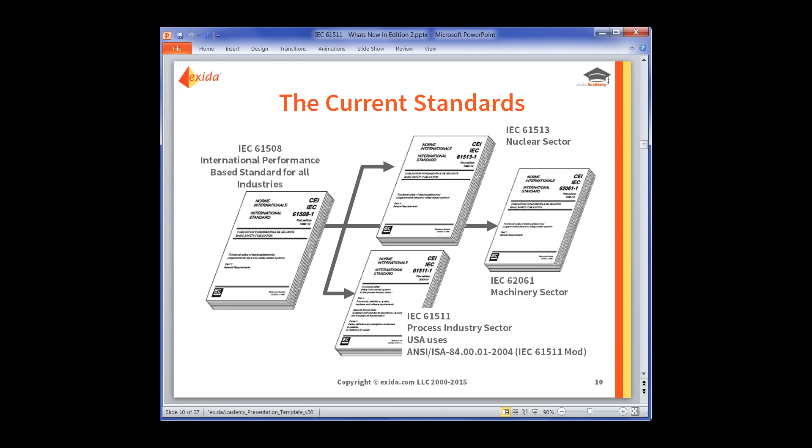So I guess for the new 61511, I'd like to go back to Douglas Adams, the author of Hitchhiker's Guide to the Galaxy, where the guide to everything is written with a cover that has the words "Don't panic" in large friendly letters. And that's probably the first thing I'd like to say about the new 61511, and that is, don't panic. Yes, it is a revision to the existing 61511, but most things remain the same, and the changes that are introduced as part of the second edition are A, generally good, and B, generally small to moderate in nature.

So again, 61511, as it has since its initial release, will still target the end users, engineering contractors, and integrators in the process industries area. It will still cover the entire safety life cycle, from analysis phase through design, construction, installation, commissioning, validation, etc., into operations, maintenance, management of change, and eventually decommissioning.

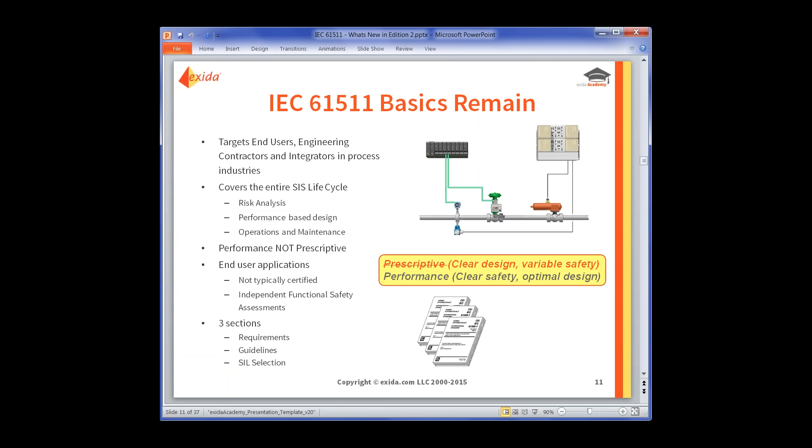Again, still focused on end user applications and still divided into the three main sections of the requirements in part 1, guidelines and advice in part 2, and then still SIL selection and risk analysis in part 3. It has the same relationship with 61508 as it always has had, with one sort of legal technicality. 61511 from 2004, whenever it references 61508, it references the first edition of 61508 because that's the only edition that existed in 2004. The second edition of 61508, which came out in 2010, was not referenced by the original 11.

However, now that 61511 is going into its second edition, all of the references to 61508 will now be from the second edition of 61508 issued in 2010. But everything else remains the same. 61508 is generally focused on the design, construction, and fundamental programming of safety devices. And 61511 is still focused on the use and application of those devices in the process sector. So none of that has changed.

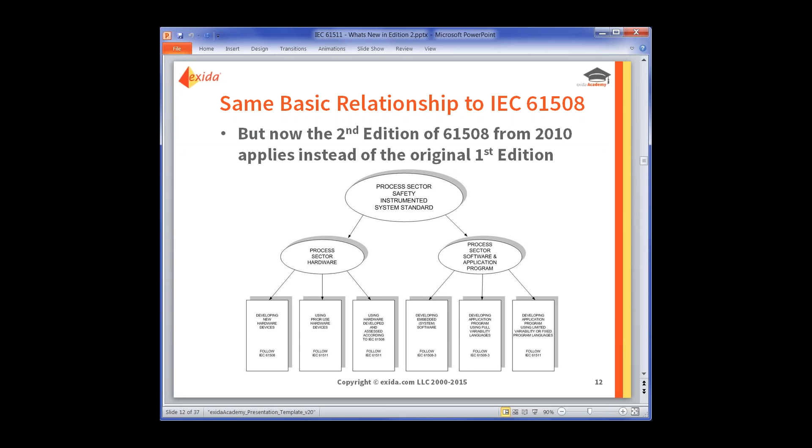The 61511 safety life cycle, it's still the same as before. We still have analysis phase, standard activities, estimating the risk, understanding the protection layers, and developing any requirements into a safety requirements specification. We then work into the same design phase, the same optional factory acceptance testing, installation, commissioning, and validation. And again, the same operation, maintenance, modification, or management of change and decommissioning, all of which remain supported by the verification activities, the safety life cycle structure and planning, and the management of functional safety and functional safety assessment requirements.

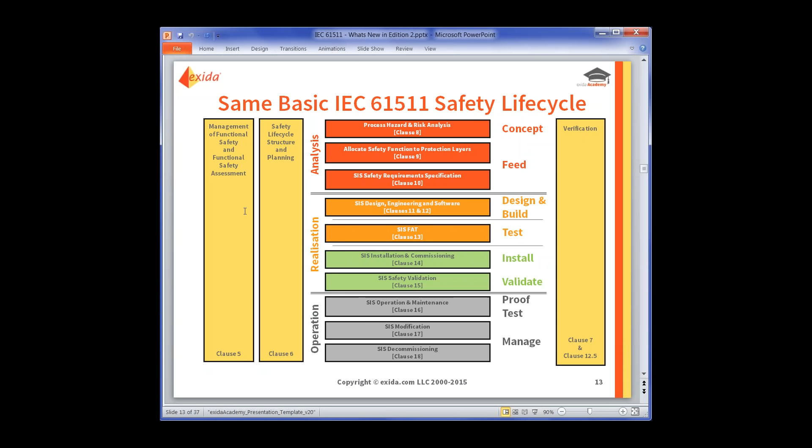It's still the same very powerful idea of setting up a risk control system. The risk controller, if you will, operates off of our tolerable risk set point, compares that to the risk we analyze in the analysis phases, and then generates a response of our safety requirements specification and other means of risk reduction to manage that risk back down to our target set point. We execute, design, build, validate, etc. that set of equipment. And then we feed into the operations phase where we again observe the behavior of that equipment and have now a real measure of actual risk that we compare back to our risk tolerance and again generate any required responses to that. This all remains the same.

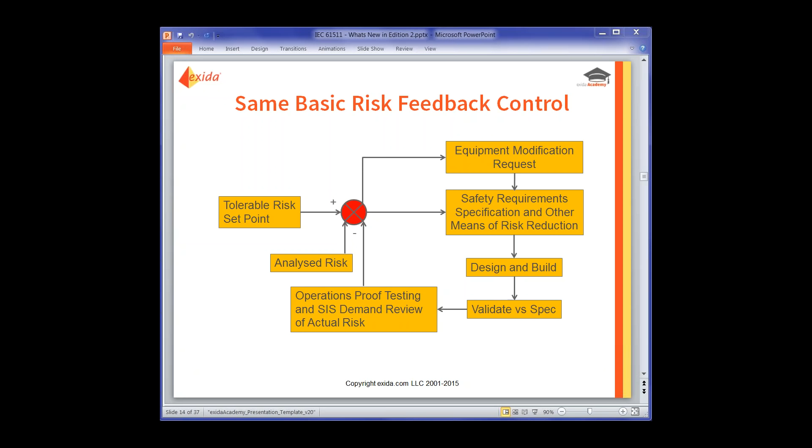So, what is different? Well, as I said, at the finer levels, there are a number of tweaks to various definitions, and by and large, these are at least generally regarded amongst the committee and the community as improvements. And the first of these is providing a bit better clarification on common failures. So we've got both common cause failures, which result from a single event, where these failures are not consequences of each other. So they're not an event that causes another event. Those are not common cause failures.

Then separate from that, we have common mode failures. Now these are failures at the same time of different pieces of equipment that fail in the same way. So if I have a unit that fails at the same time for a different reason, that is still a common mode failure. But the detailed difference between these two definitions, the most important element here is that each of these common failures is directly stated out. Whenever I have quotes in this presentation, they will refer to exact text from the standard. So we will see that from time to time in all of this. So, as I said, each of these common failure types reduces the effectiveness of system redundancy and fault tolerance. And we'll talk a little bit more about that later.

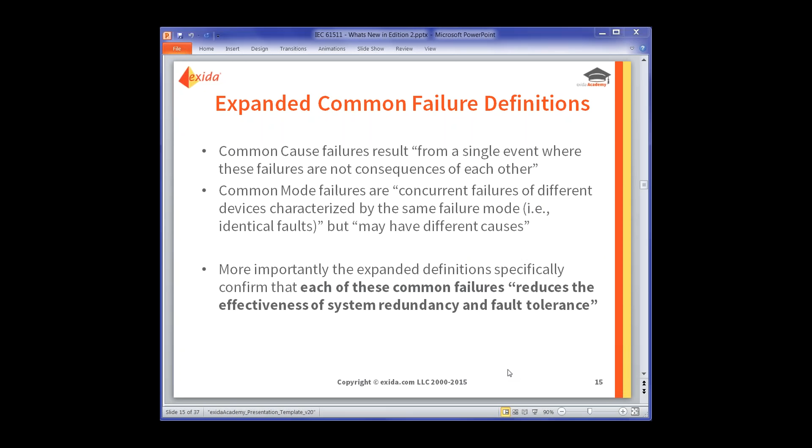Now, we have the completely new term, or at least new to the standard. Many of you have worked with this for quite some time, and that is the concept of a process safety time. The old 61511 really only considered the response time of the safety system. And the statements were very basic that said this response time had to be specified and that specification had to be met.

However, the new 61511 defines the process safety time as the time period between which a failure occurs in the process or the basic process control system and the occurrence of the hazardous event if the safety function is not executed. Now, in Part 2 of the new 61511, the guidance is that the sum of the diagnostic test interval for the programmable or safety logic solver and the time to perform the specified action must be less than the process safety time.

Now, this is actually somewhat different from the generally accepted rule of thumb that says the target response time for the safety system should be less than half the process safety time. So we have a little bit of a gap here between the statement in the standards and the accepted best practice on this. So that is something that we definitely need to pay attention to in our work here. So the difference here is something that we do want to pay attention to.

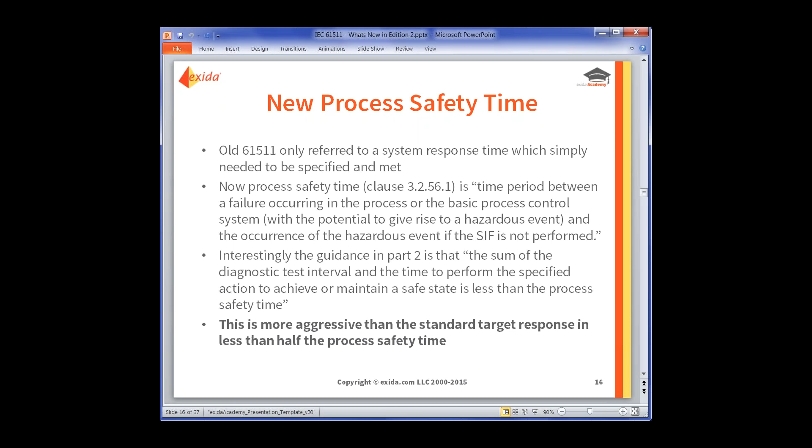All right. Another difference is that safe failures in the new 61511 are somewhat better defined for redundant systems. So whereas the old definition of a safe failure was often something along the lines of any failure which isn't dangerous in certain cases, especially with the old 61508. Now we have a clarification with fault-tolerant systems that say safe failures can either lead to operation where the safety function is available with a higher probability of success on demand.

And the example would be where in a 2 out of 3 configuration, one of the devices fails safe, which then effectively means that we have a 1 out of 2 configuration remaining in that situation. Or again, as we hopefully have always known, a spurious operation where the safety action does trigger remains a safe failure. So we do have a little bit of clarification around the voting structure here.

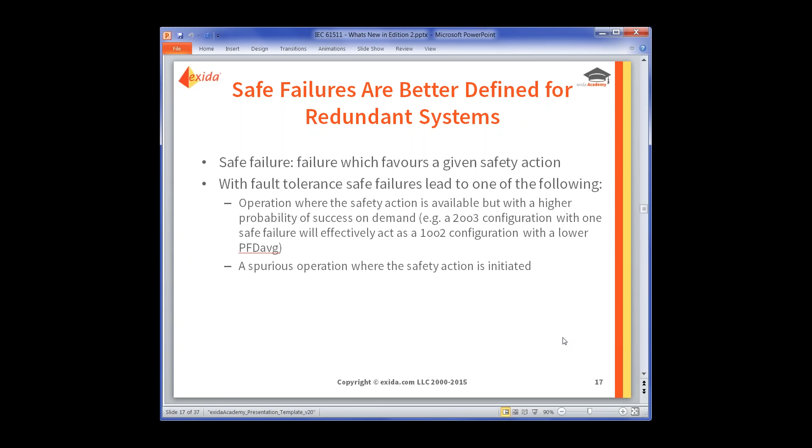This next definition is actually quite an improvement over the old 61511, because the old 61511 actually had a mismatch with both first and second edition of 61508, because the old 61511 did not define a high demand mode of operation. Now, the new 61511 addresses this and clearly defines 3 modes of operation: a low demand, a high demand, and a continuous mode that is now consistent with the definitions of 61508.

The split in all of these is that low demand mode is where the safety function is required to act less often than once a year, and the high demand and continuous mode are where the safety function is required to act more often than once a year. Unfortunately, there's a little bit of a problem in the math here, and the problem is that the proof testing frequency is no longer part of the definition, and this can lead to some difficulties where the calculations might not give you the best answer if you're doing very frequent proof testing on a high demand mode of operation.

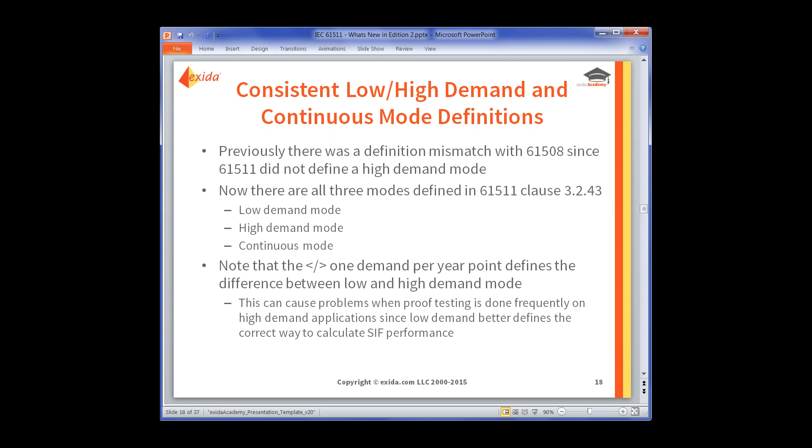We're just going to mention that here. This involves a fair bit of detail in clarifying and specifically explaining, so we're going to need to leave that for another presentation, but at least I want to make sure that we have it noted and mentioned in this current one. So again, we have 3 different modes of operation for our safety function in 61511 that is now in agreement with those same sets of definitions that exist in 61508.

So for low demand, where we have less than once a year requirements for the safety function to act, we use our PFD average calculations. We get credit for proof testing. And we get credit for our diagnostics with lambda D, or dangerous detected failures, lambda DD, as opposed to dangerous undetected failures, lambda DU. In high demand mode, more than once a year demands on the system, no credit for proof testing unless we have a non-zero hardware fault tolerance, and we take credit for automatic diagnostics.

And then finally, the continuous mode, where the requirements for the safety function are so constant that automatic diagnostics no longer have time to act. And as a result, we have both dangerous detected and dangerous undetected failures being equally harmful. And both of those go into the probability of failure per hour calculation for defining SIL in this.

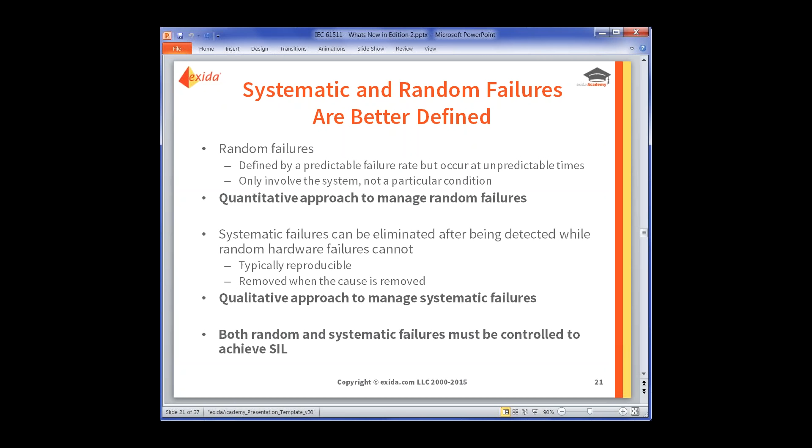And obviously, in order to achieve a given SIL, we need to ensure that both random failures, typically through the numbers in the PFD average calculations, etc., meet the requirements, and also the systematic failures must meet the requirements as well. And this is supported further by the emphasis of this systematic capability concept.

It was present in the previous standard, but in a much more vague way. And now we have a much clearer definition. In fact, it even gets its own acronym. We have an SC level now, a systematic capability level. And this relates to the level of rigor used in the design of our equipment in accordance with 61508, or the level of rigor applied in our proven in use justification, that the devices we're using have appropriately low systematic failures or an appropriately high systematic capability.

Now, again, systematic capability alone doesn't get you there. Obviously, you have to follow all of the guidelines and the other aspects of the 61511 safety life cycle. But again, it's clearly laid out that the systematic capability requirement of the individual devices must be met as part of achieving any particular SIL for an overall safety function.

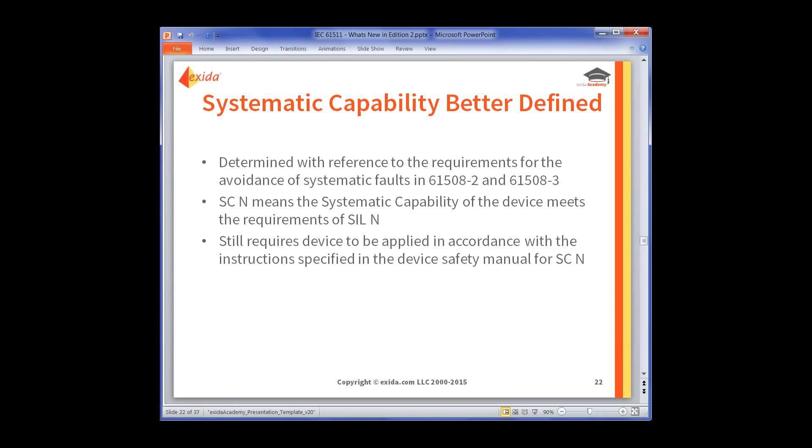As I said, prior use is another way of demonstrating systematic capability, and the new 61511 has clarified that, but only slightly. And this is still a fundamental challenge in applying 61511 proven in use guidelines as a way of ensuring that systematic capability has been met.

The concept is solid. It's, again, as it has always been, demonstrating that a device based on previous operating experience in similar operating environments is suitable, capable for use at a given SIL. And it is, again, a very powerful tool for managing systematic failures. Now, this is separate from the hardware fault tolerance that we'll talk about in a little bit, and it's separate from the PFD average and the random failure rates that we've already talked about.

Now, even though the new 61511 lists a whole range of items which must be included in any proven in use or prior use justification, 61511 is still very short on the details. And if you really do want to get a firm understanding of the details, you actually need to go back to 61508 and look at the equivalent systematic failure management requirements in that standard to provide at least a reference point for how robust any proven in use justification should be in order to achieve the same result.

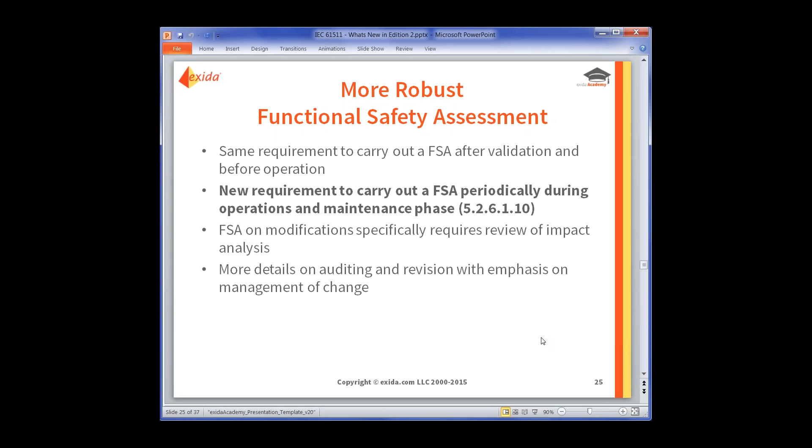All right, so onward. There's a general tune-up of the design verification requirements. There's a slightly increased emphasis on testing and an expanded list of items to include in any particular verification test plan. So this is generally during the design phase of the safety life cycle, where we're putting things together and so forth. And this also cross-integrates with requirements of other standards, so that can be very helpful in a specific sense. So 61511 calls out the requirement for other standards, such as burner management standards, for instance, that can be part of and should be addressed as part of any testing during the design phase.

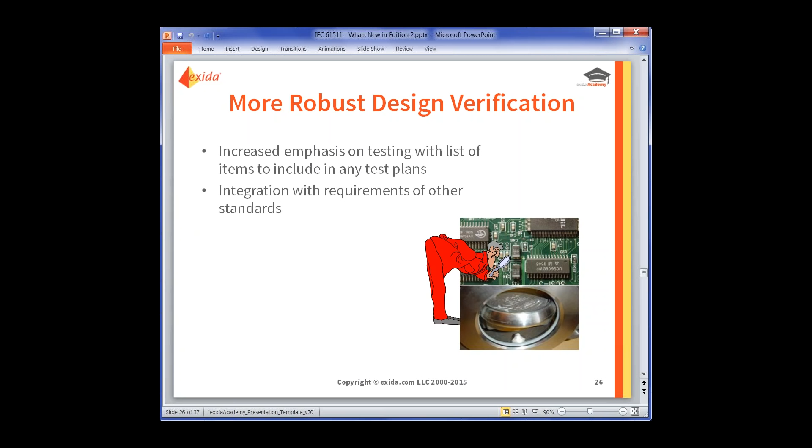Another new thing with 61511, and this to a certain degree mirrors the new 61508 that came out several years ago, is that cybersecurity requirements are now a specific part of the standard.

The standard also considers both intentional attacks, hackers, as well as unintended errors. And again, if any of you have played with a number of ICT elements, the unintended errors are actually more common than the intentional attacks, but fortunately are often not as maliciously dangerous.

Now, the new 61511 includes a requirement as to how you're going to respond to these security threats, and that you have to be successful. That is, you have to achieve enough resilience against these risks, but it doesn't lay out any of the details.

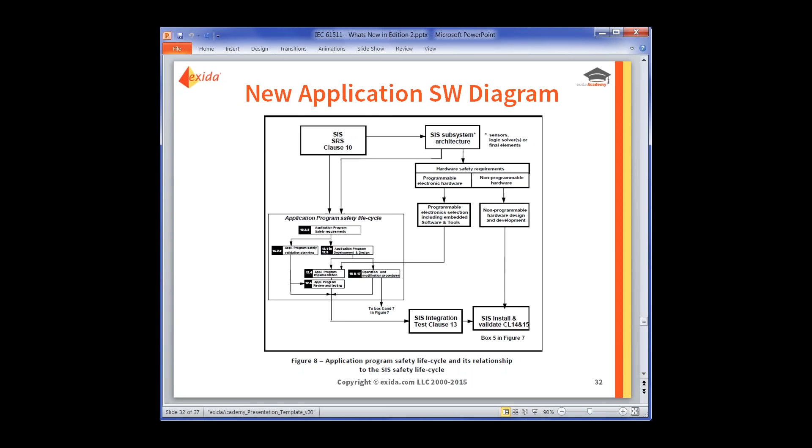Now, again, with limitations on time and detail, we're not going to be able to go into this in a lot of detail. And we're going to need to leave some of this stuff for another web seminar.

But basically speaking, the new Clause 12 has divided application software considerations into 4 categories. You've got the general stuff, you've got the design of the software, you've got guidelines on the implementation of the software, and then guidelines on showing that the stuff works. So it's a little bit more concisely focused on a sequence of operations than it is with the old V-model diagram that appeared in the old 61511.

Now, it's more of a change in organization than a change in requirement. So the overall application software requirements remain. But again, as I said, anything at the fine detail level, we're going to have to leave out of this webinar at this time, and we'll save that for a future date.

As we then go into the final validation phase before we bring the safety function into service, and then the long operation and maintenance phase, there are some additional details on showing the software works. There is additional emphasis, as I said earlier, on bypass requirements for the safety functions. Making sure everybody knows what's going on and making sure you've got an emergency backup. Some kind of compensating measure to ensure that you don't kill anybody when you are maintaining these things and have them in bypass.